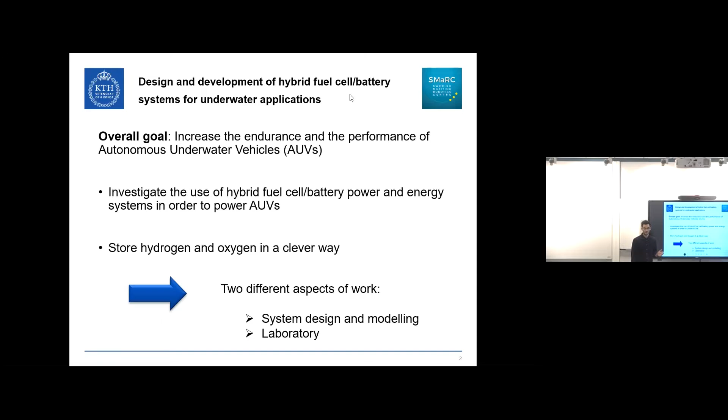I've been working on two different levels. There's system design and modeling: how do we find the best combination of fuel cells and battery in order to fulfill some missions? And I've also been working at lab scale to find the optimal working conditions for a fuel cell in a closed environment. I'll talk about that later.

But first things first: why do we want fuel cell systems in an AUV, and why combine it with a battery pack? Here is the so-called Ragone plot, our favorite electrochemist plot. It shows the energy density—the amount of energy per liter—of different electrochemical power sources, and here you can see the power density.

Fuel cells score quite high in terms of energy density, whereas batteries score quite high in terms of power density. By combining fuel cells and batteries, we can achieve long-range missions with high endurance, but also reach high power demand.

For example, when we have a peak power demand—we need to speed up, dive, or turn on some sensors, or there's an upcoming obstacle—the idea of hybridization is to combine the two advantages of these electrochemical energy devices.

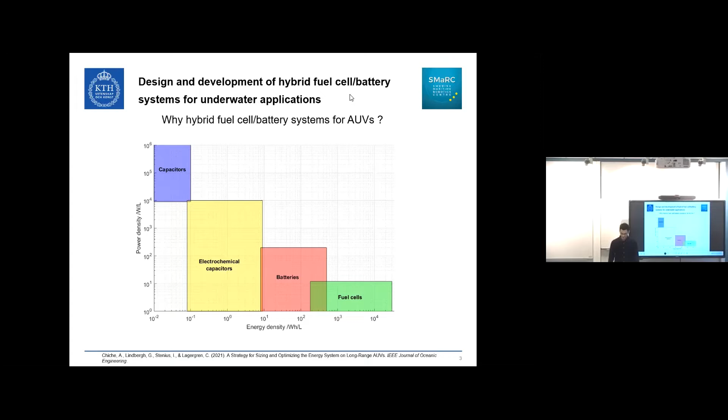In the last 4 years, I've had a couple of milestones. First was to find a methodology, a strategy to optimize the design of hybrid systems. As I said, also to find the optimum operation points for a fuel cell in a closed environment, because in AUVs you are working in a closed environment.

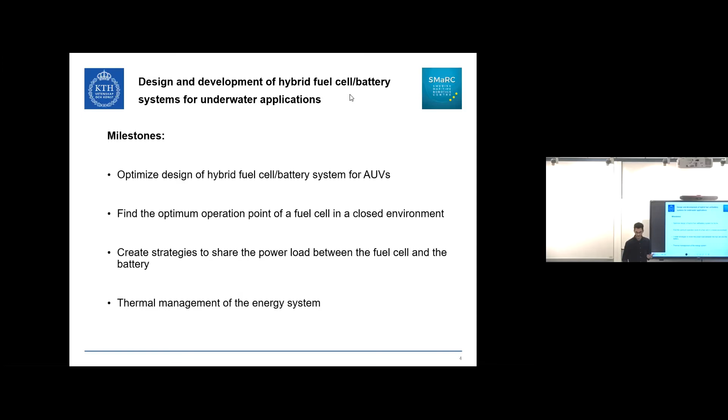You need to store both hydrogen and oxygen, and the conditions can be different compared to car applications, for example. We've also been working on creating strategies to share the power load between the fuel cell and the battery, and there are thermal considerations to consider when designing the entire system. I'll go through the different milestones and try to summarize everything here.

When I started here, the first step was to show that it was feasible to have fuel cells in AUVs, and to show why it was important and useful—to convince people. So the first step was to design a strategy to optimize the system: to find the best combination of fuel cell power and battery pack energy content, in order to fulfill the mission with the most compact system possible.

By doing that, we compared several hydrogen and oxygen storage solutions, and at the end, we compared the weight and volume with a full battery solution.

For the same energy content, here you can see the volume of different hybrid systems, depending on how we store hydrogen, compared to the volume of a full primary battery pack. Those primary batteries serve as a reference point, but they are not rechargeable—nice for emergency missions, but not something you want on the long run. In addition, we also consider buoyancy, because we want the energy system to have a neutral volumetric mass.

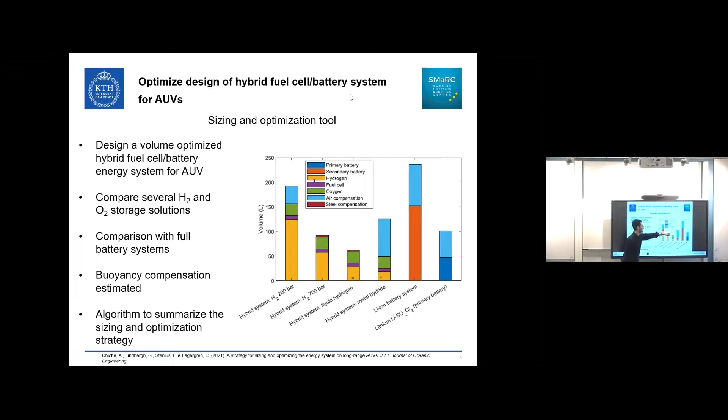So we also consider different air or steel compensation depending on the case. But I can explain to you how it works roughly.

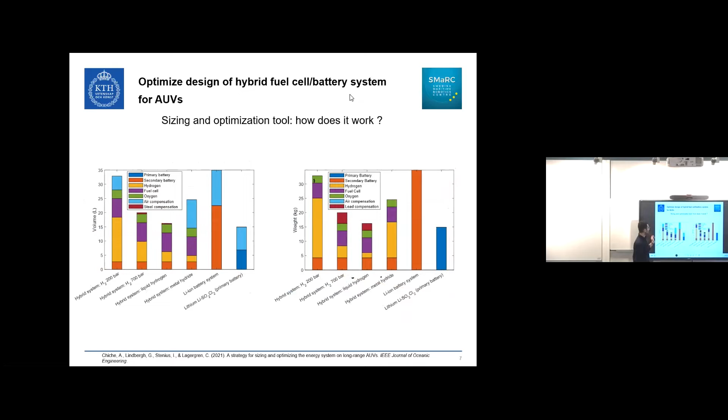And once you actually choose a proper fuel cell nominal power, you can compare different ways of storing hydrogen. For this 5-hour mission, we can see that all the hybrid systems compete with the full battery system.

But the big picture for this study was actually this big graph. So what does it tell us here?

Here we can see that in terms of energy density and specific energy, when we run short range missions, like 1 hour or a couple of hours, the hybrid systems, so fuel cell and battery, score quite bad, meaning that it's quite complicated and not worth it compared to the energy density of batteries.

But as soon as we increase the length of the mission, for example 100 hours, 500, 1000, even more, we can see that in terms of energy density and specific energy, the hybrid system is always way better than the secondary battery system. Here with compressed hydrogen, and here with liquid hydrogen, you can see that we have a very high energy density and specific energy.

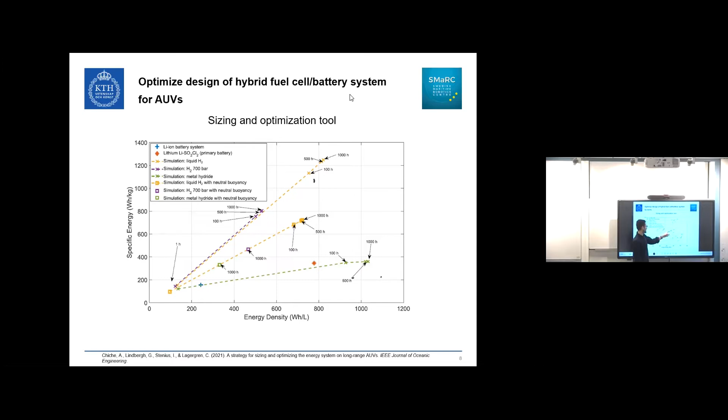And what we can also see is that when you increase the length of the mission, at some point you reach an asymptote in terms of energy density and specific energy, meaning that at some point the only thing that matters is actually the hydrogen tank and oxygen tank. You can see that you're always higher in energy content than the secondary battery.

So what do we learn from that first study? This sizing strategy was developed and successfully validated, and the optimization guarantees that the selected system is the most compact one capable of fulfilling the mission. The hybrid system becomes lighter and more compact than a full secondary battery system when the length of the mission increases.

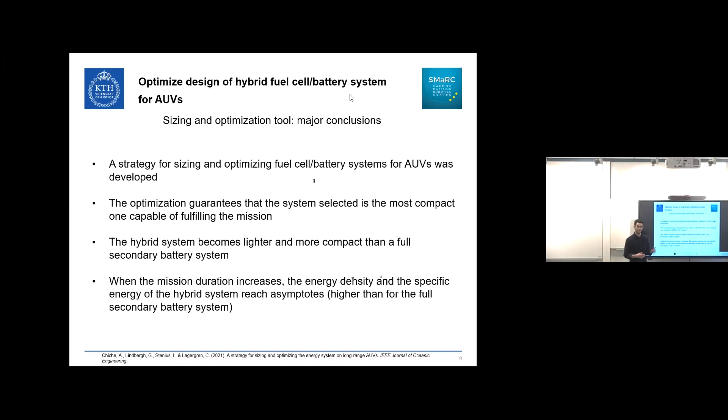And that's kind of off topic, but we could implement that same strategy for another application, which was a rescue boat in a lake in Sweden. So we did exactly the same: we had some considerations and had to create a power profile for it.

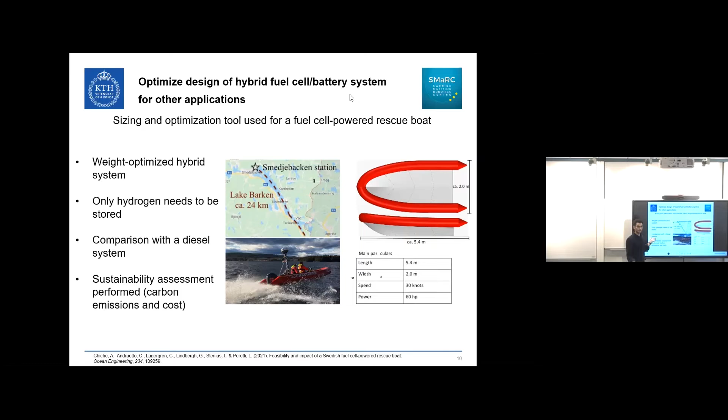But in that case, it was weight optimization and we didn't need to store oxygen, and we also didn't need to do the buoyancy compensation. But we could see that we had quite similar results. So for boat applications, the hybrid system is always much lighter than the battery system, and when we have a very compact way of storing hydrogen, like liquid hydrogen, it almost competes with the ICE system, the diesel engine.

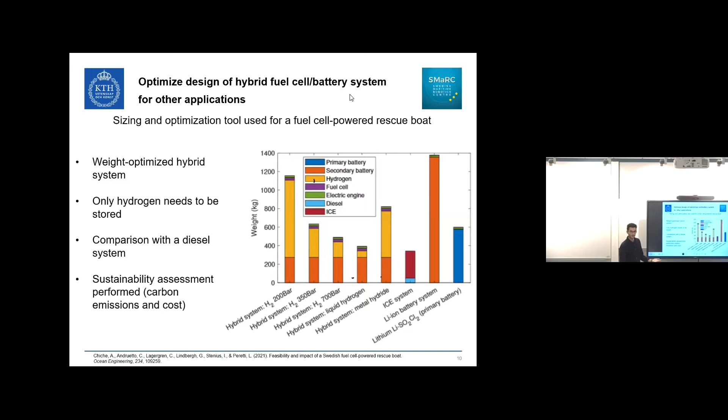That's kind of out of topic, but it was a way to show that the developed methodology was robust and could be implemented on other applications.

But as I said, I've been working on this sizing and design of hybrid systems, but I've also been working on lab scale. Hydrogen, since fuel cells use hydrogen as the fuel, is what we pay for at the end of the day, right?

And a good way to save as much hydrogen as possible is actually to close the outlet of the hydrogen channel to make sure that all the hydrogen reacts.

So we have what we call 100% fuel utilization. But by doing that, you actually accumulate water and impurities within the fuel cell. So at some point, the performance of your fuel cell stack will decrease. So you need to open the hydrogen outlet every now and then to let the accumulated water leave, and also the impurities that can accumulate in the system. So we call it dead end mode, but we need to open the purge valve every now and then.

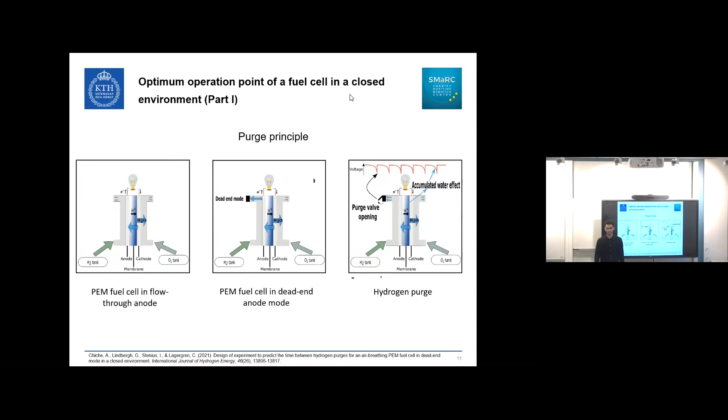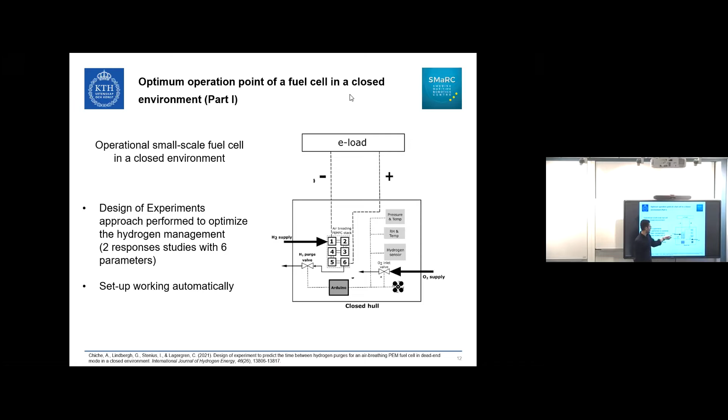And the aim was to find the optimal way of controlling a fuel cell working in dead end mode in a closed environment. So in order to do that, I built up a setup, which is a PEM fuel cell in a closed environment with hydrogen supply and oxygen supply. And we have a bunch of different sensors like pressure, relative humidity, temperature, a hydrogen sensor in case of leak, and also a hydrogen purge valve.

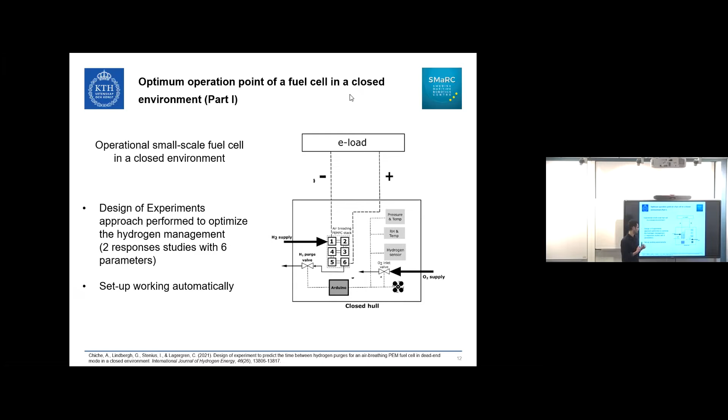And the idea was to perform a design of experiment on 6 different parameters and study 2 responses. So the 2 studied responses were the time between 2 needed hydrogen purges, and the performance of the cell. So I can show you how it looked like.

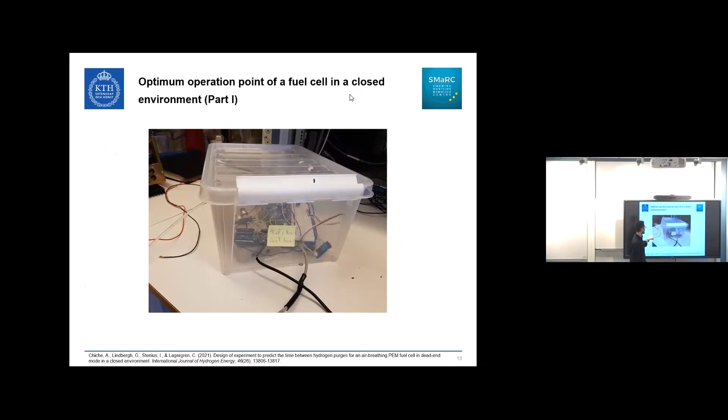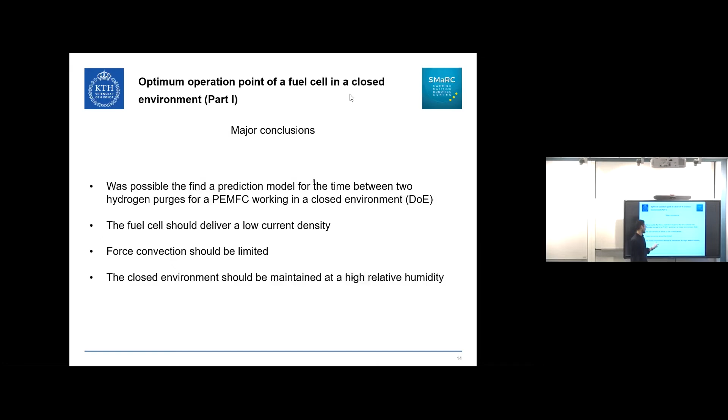And the major conclusions from that study were that, first of all, it was possible to find a prediction model to get the time between 2 hydrogen purges for a PEM fuel cell working in a closed environment. And that's the most important part. So in such an environment, an AUV-like environment, the fuel cell should deliver a relatively low current density, so it produces less water. The forced convection should be limited in the system. And the closed environment should be maintained at a high relative humidity, so 95%, 100%.

But to continue on this lab scale experiment, a new idea was, always the goal is to improve the performance of the cell and to increase its stability over time. So we've tried a new approach, we modified the setup. We've added some three-way valves in the inlet and outlet. So it's a bit complicated here, but to summarize, after each purge of hydrogen, we actually reverse the flow of hydrogen within the cell.

So for example, first configuration, hydrogen goes from cell 1, 2, 3, 4, 5, 6, then it's blocked. And then when we need to purge, we purge it. The voltage of the cell recovers, and then we close the purge valve, and the hydrogen goes this time from cell 6, 5, 4, 3, 2, 1, and it's blocked. So we call it symmetric purging strategy: we reverse the flow of hydrogen every time we need to purge. And the idea here is to have a more homogeneous water management within the stack when we run it.

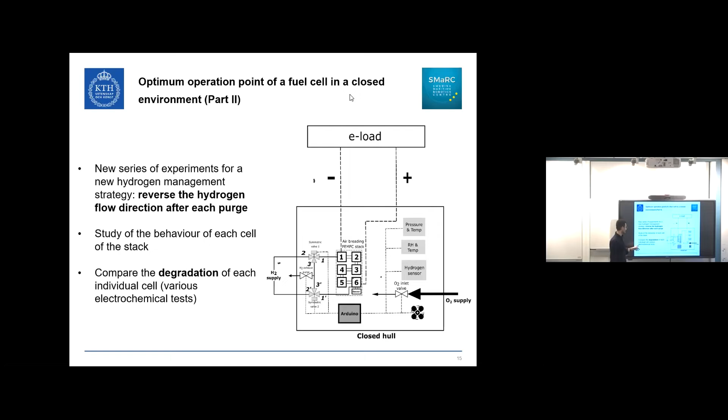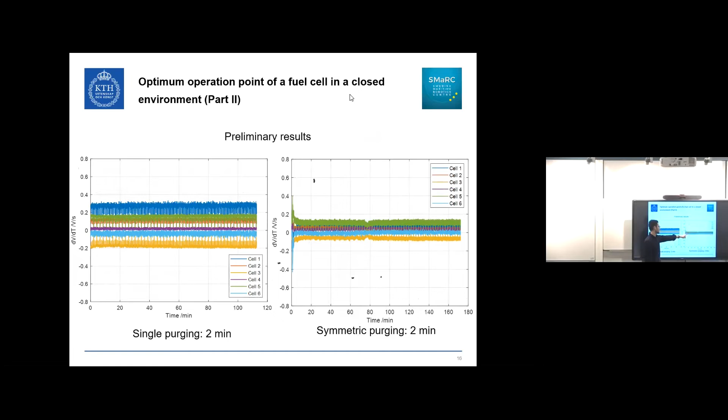Because, long story short, for fuel cells, stability is always connected with the water content within the stack. And the idea here is to compare the degradation of each individual cell. So we perform various electrochemical tests. It's an ongoing study, but here are some preliminary results. Here you can see the derivative of the voltage of the cells over time. This is when we have the single purging strategy, the first version, and this is when we have the symmetric purging strategy. Right now it's a bit ambitious to draw big conclusions, but what we can see is that we have way less variations with the symmetric purging strategy compared to the single purging strategy.

So yeah, what we can say is that the symmetric purging strategy seems to maintain a stable overall performance of the stack and increases the stability of the stack as well.

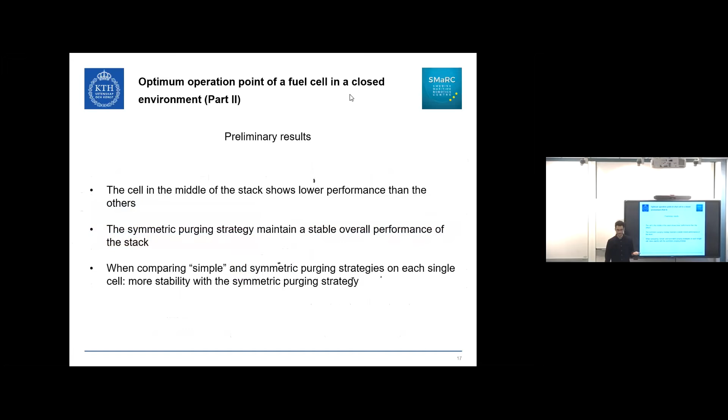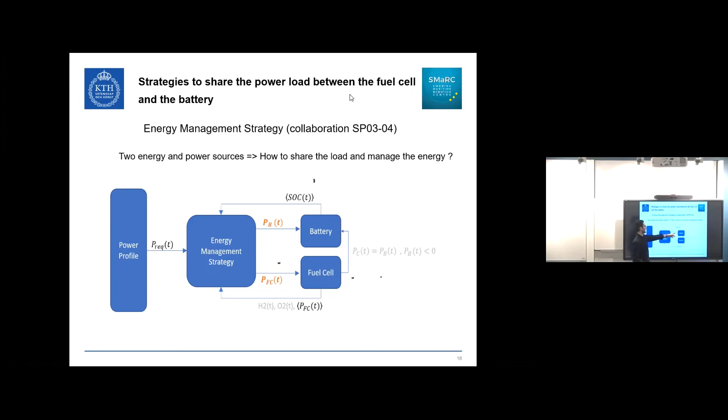All right, so now let's jump to another milestone, which is actually a collaboration with Arsha and Clemens here. In a hybrid system, we have 2 energy and power sources, aka the fuel cell and the battery pack. And the question is, how do we share the load between those two devices? And the answer is using energy management strategies.

So an EMS sets the behavior of a system based on its state and according to a strategy. So basically, we have a bunch of inputs that we read live, so fuel cell voltage, power demand, etc. It goes through an EMS, and then we set the fuel cell output power, the battery power, hydrogen consumption, etc. And it has several objectives.

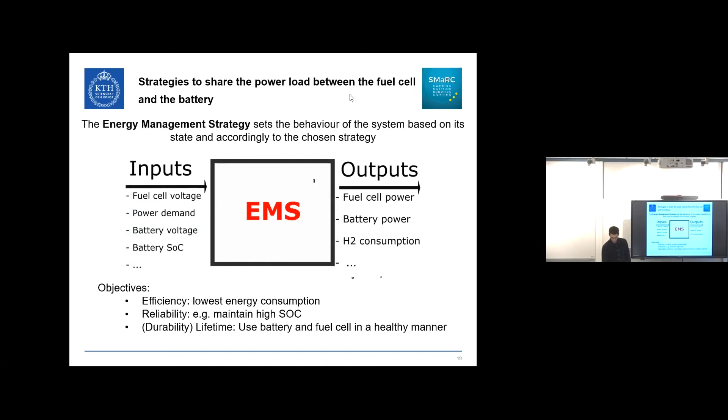And the idea was to try some different energy management strategies and compare them. So we were quite lucky to have some data from real missions. So we created 4 different EMS. So 2 were what we call rule-based strategies. So they are based on experts' knowledge. Basically, usually it looks like a lookup table.

So it's based on what experts say, like, oh, in that situation, it's better to run the fuel cell in that way and the battery in that way. So we have 2 strategies like that. And we have 2 strategies which are optimization-based strategies. So the idea here is to create a cost function and try to minimize it over time.

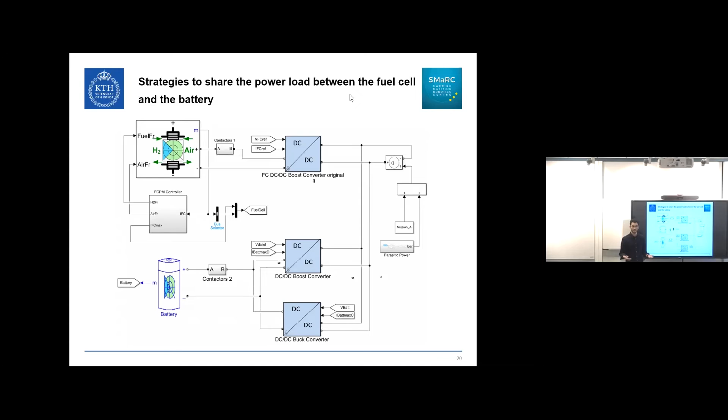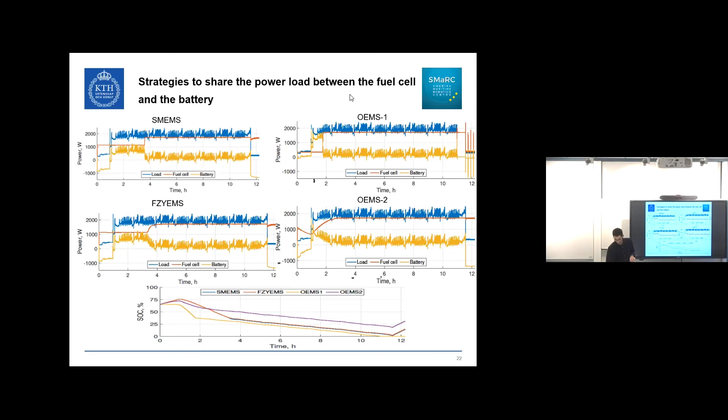But it's not because it's a trade-off that we can't draw some conclusions or recommendations. So what we can see here is that fuzzy logic EMS, like rule-based strategies, can be suitable for missions with low risk. For example, going around an algae farm, which is a mission that you will do every second day or every day, where there is little chance of losing the AUV, and where you want to decrease the hydrogen consumption because you will run it quite often.

But more complex optimization-based methods can be recommended for missions with a high degree of uncertainty because, well, we want the mission to be fulfilled. So it's okay to consume quite a bit more hydrogen. It's okay to pay more in terms of hydrogen if we make sure that the AUV comes back.

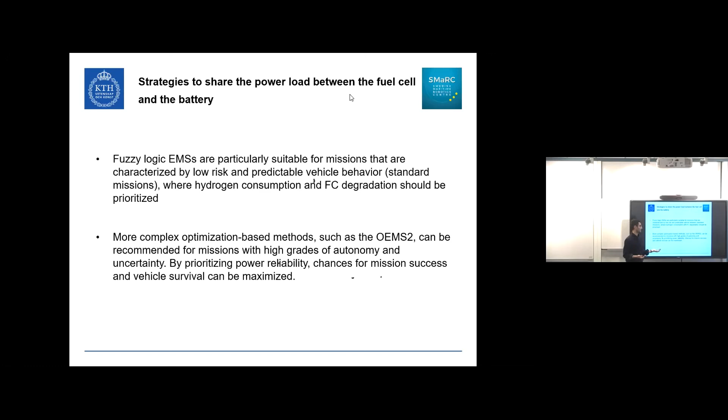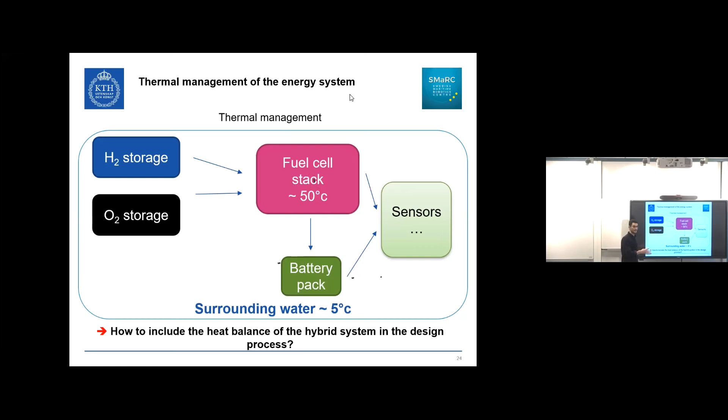All right, now the last milestone before I wrap up this presentation is thermal management. So one question was raised: how do we include the total heat balance of a hybrid system in the design process? Because we have the fuel cell generating heat, the battery pack generating heat, and depending on the way we store hydrogen and oxygen, we might need heat or we might generate heat.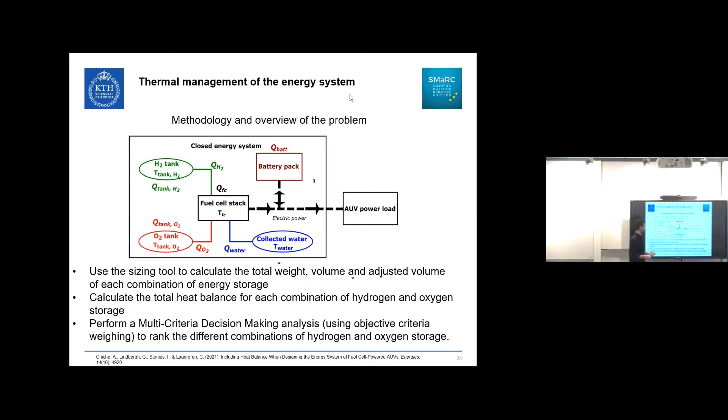We needed an objective way to compare pears and apples—how do we compare volume with energy in a decision process? So that's what we did.

We had 5 different criteria: specific energy, energy density, volumetric mass, total heat, and the heat only for the storage. We used 2 weighting methods, and we could see that the sum of the 2 heat criteria is kind of always the same for both methods. When we rank all the different combinations, the ranking is also quite similar.

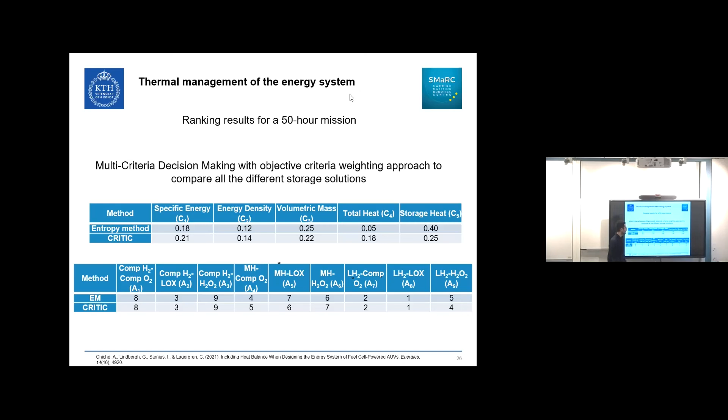It showed that the combination of liquid hydrogen with liquid oxygen is actually the most promising one when we consider all the criteria. The combinations of liquid hydrogen with compressed oxygen, or liquid oxygen with compressed hydrogen, are also very interesting. Whereas, for example, the use of hydrogen peroxide as an oxygen storage unit is quite bad, or ranked quite poorly.

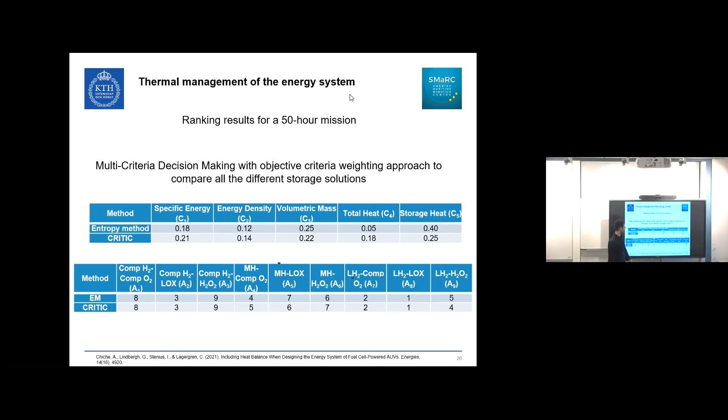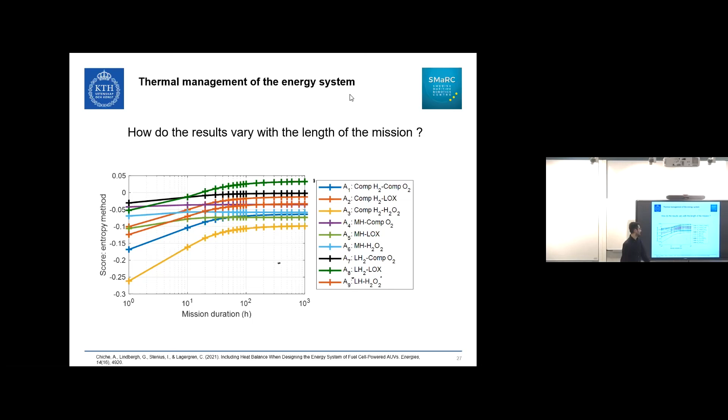We could also see that even when we increase the length of the mission, the ranking stays the same, especially for missions above 100 hours. So it's consistent over time.

Some major conclusions from that study: chemical oxygen storage, like hydrogen peroxide, scores quite badly, so it shouldn't be used in an AUV application. There is quite a big trend favoring liquid hydrogen and liquid oxygen tanks. But what we could see is that the fuel cell is actually a major contributor to the total heat balance, so no matter which hydrogen or oxygen tanks we choose, we have to handle the heat from the fuel cell anyway.

We used an objective weighting criteria, and to further develop that strategy or study, we should also use subjective and practical considerations.

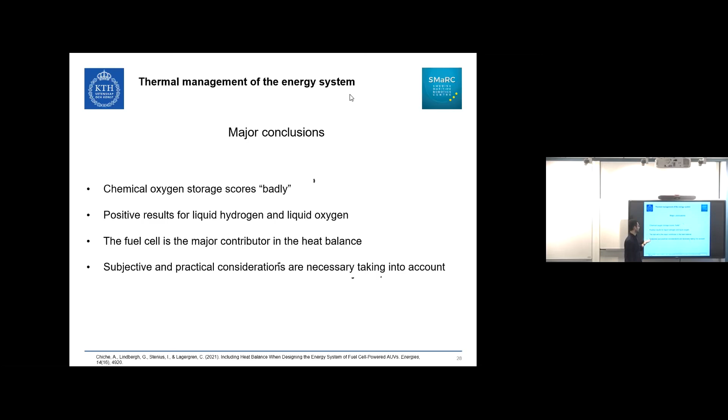From a more academic point of view, to summarize what I've done: we could publish a little bit on those different milestones. We published the first series of experiments, the design of experiments on the dead-end mode—that's actually the most important one. We could publish the sizing strategy, which is kind of the base of this whole PhD project. We could also publish the boat application, and the heat study I just talked about. We also contributed to different conferences, some about AUVs and some about electrochemistry and fuel cells in general.

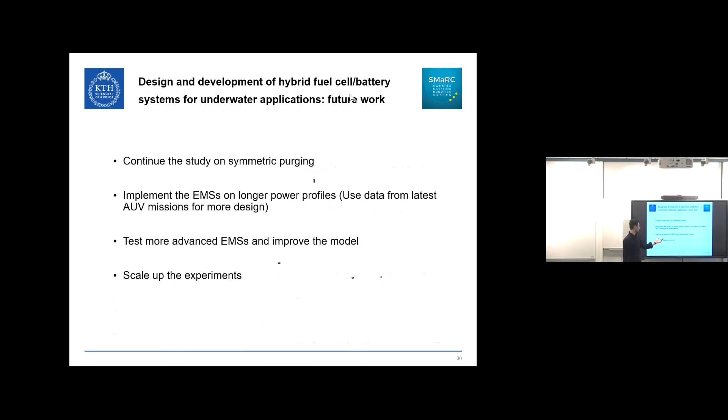As for what's next, to finish this project, I will continue with the symmetric purging, try to improve the EMS, and I guess at the end of the day, we want to scale up the experiments and have a fuel cell in an AUV. And that's all for me. Thank you.